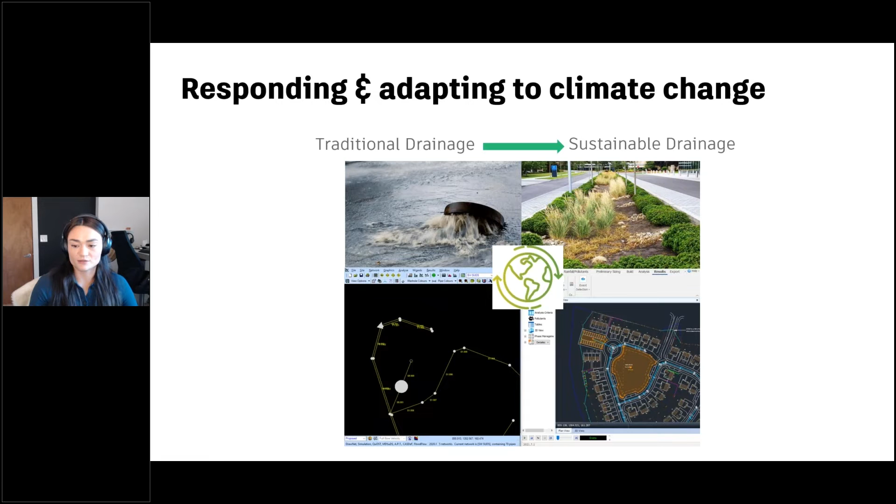They want to make the most of the wider benefits of a sustainable drainage system. So with these moving demands and these drainage design challenges, we needed to create a better solution to provide the drainage design tools for now and for the future. And so that is InfoDrainage.

InfoDrainage is our next generation drainage design platform. It has a graphical interface, highly detailed green infrastructure analysis, and streamlined workflows. We've built it so you can design creative, sustainable drainage structures as true to life as possible, as well as improve your ability to model and communicate increasingly complex drainage schemes.

I'll pause here to mention that Innovyze has a long history with drainage design. Our Micro Drainage product dates back to the 1980s. Since then, we've been able to harness that 40 years of industry research, development, and knowledge into InfoDrainage.

So how does InfoDrainage solve those drainage design challenges? For the remainder of this presentation, I'll go through these four main mechanisms by which InfoDrainage allows you to address those drainage design challenges that we mentioned earlier. And we'll start with project efficiency.

Really, this aspect is kind of the most important, if not the most prevalent, that underlies all aspects of InfoDrainage. I can evangelize green infrastructure as much as I want, but if it's not an efficient tool, if it's not helping you be more efficient with your workflows, then there's not really a point.

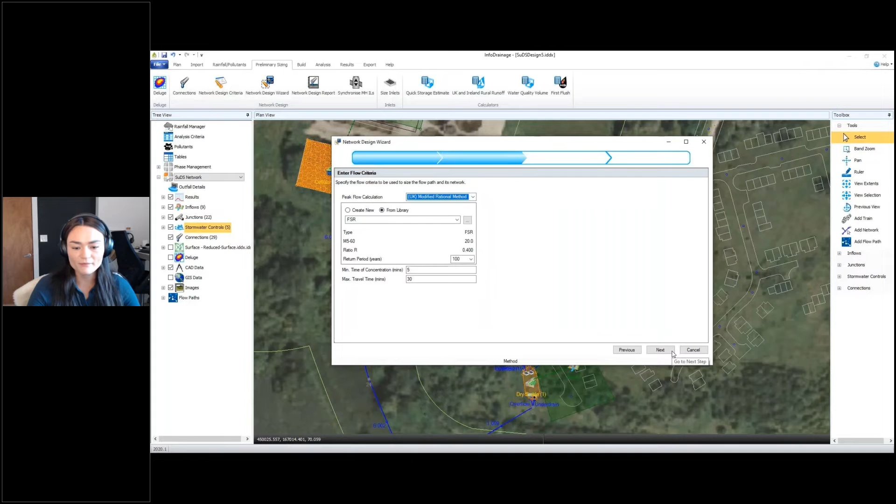Here you can see an example of our network design wizard, which guides the user through the right-sizing and network optimization workflow. All recommendations to the user are clearly highlighted and easy to review, with no changes being made without user confirmation. So you have control over what's being updated and what's not.

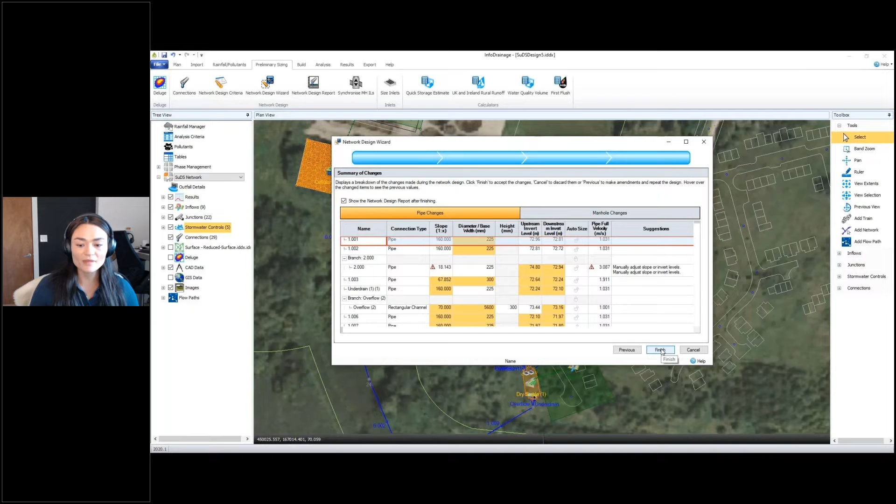These full network details can also be reviewed in tabular format, just to keep everything organized. And we also have storage requirement calculators built in, and results can be used quickly to create or modify structures. In this example, we're using that calculator to resize a cellular storage structure.

Once we accept those changes from the calculator, we can see the results applied automatically to both the detail of that storage structure and on the plan layout.

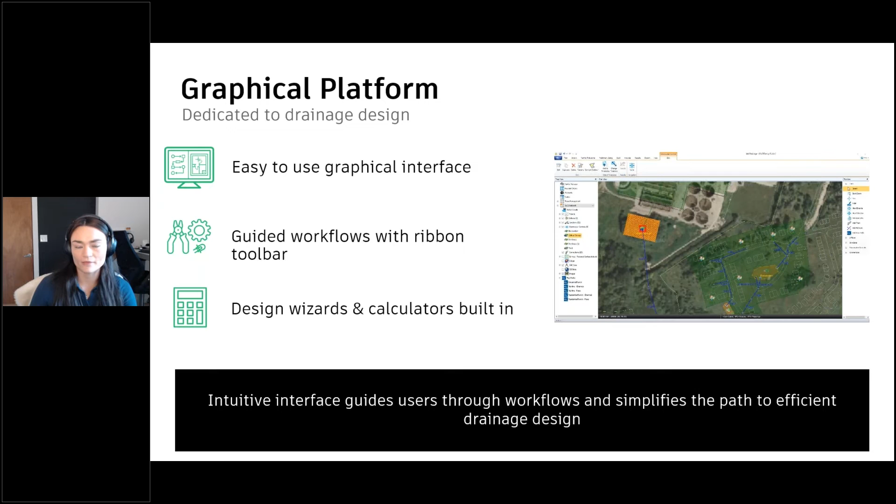Moving on to simple data import. Data is obviously generated in many formats, and InfoDrainage essentially helps you make use of what's already available, so you're not having to manually retype any information, enabling you to really utilize anything and everything you already have available.

There's a wide range of different data formats that can be seamlessly imported to create and update those designs more quickly and efficiently. This allows the user to better utilize existing data for a site and remove some of that manual workload. Being able to make use of existing data supports a streamlined design process.

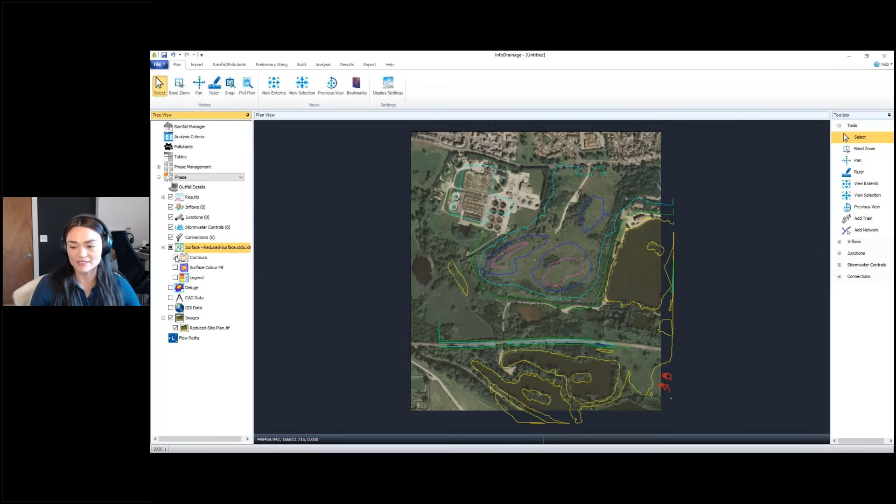With this data available and quickly imported, it'll enable tools like the deluge function to identify blue-green corridors on a site. We'll go into that deluge tool a little later, but you can see how easy it is to add imagery and surface data.

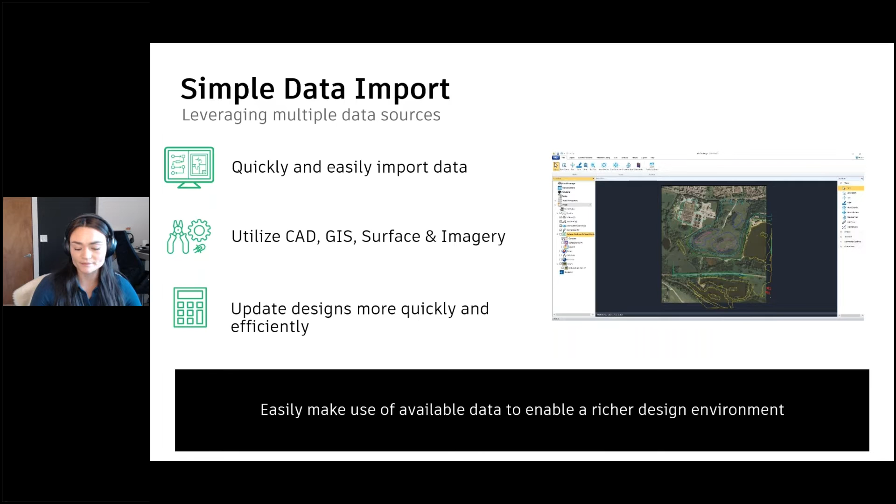Along those lines, there's also this streamlined design process within InfoDrainage, again being able to more quickly set up a model by intelligently importing that design data, leveraging CAD and GIS, and not only having those things loaded as background imagery, but actually applying and importing them intelligently so you can apply them as aspects of your drainage design model.

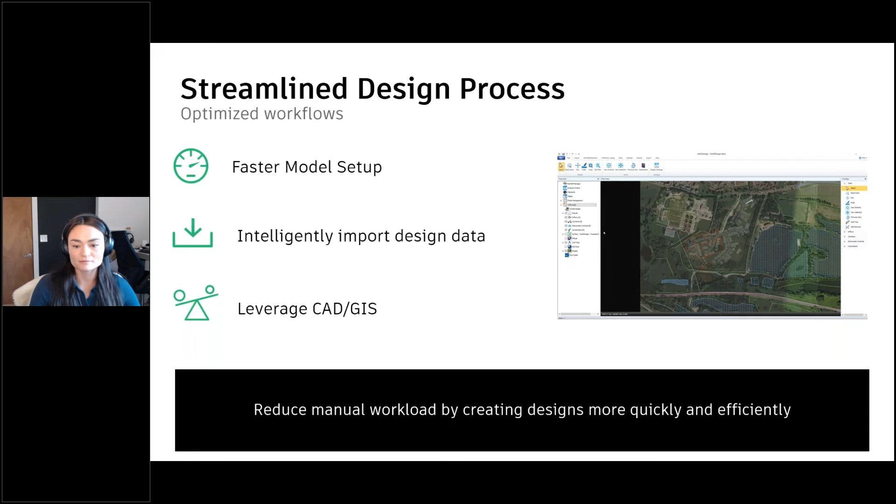So again, there's a wide range of different data formats that can come in. One key task is the definition of catchment areas or inflow areas, and then the assignment of these areas to the structures that are going to drain that water.

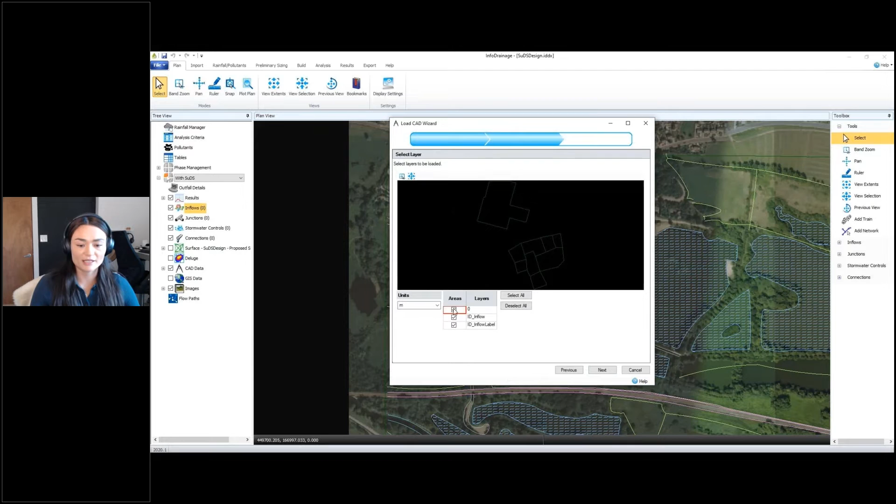Here you can see we're importing a CAD file which contains those catchment areas, and we've made this process faster so these can be imported directly. You can select which layer those are on via the import wizard. These catchment areas are now loaded and ready for assignment, which can be done directly on the plan, and you can start to update the characteristics of those drainage areas as well.

This is the concept-to-construction idea I was talking about earlier. Because of the tools within InfoDrainage, we're given the flexibility to continually modify designs on plan as we move through different iterations, different phases, and different levels of detail. It gives us a fast and iterative drainage design workflow.

From the outset of your design process, it's easy to lay out items graphically on plan. In this example, having already created an outline pipe network, you can see how easy it is to create green infrastructure elements such as a bioretention area or swales, and then connect these design elements to rapidly create those initial drainage design plans.

Here you can see we're using the Add Train tool to lay out some swales graphically on plan, and being able to make use of that supporting site data is crucial, but it's also rarely static.

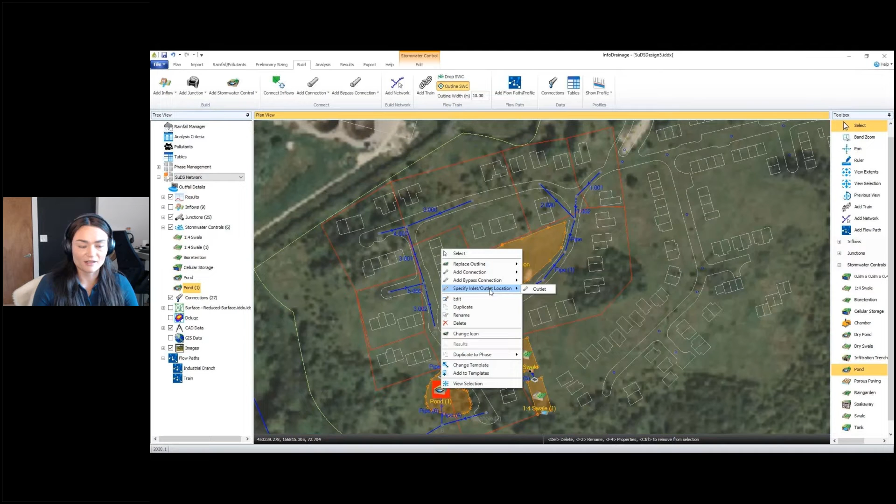The flexibility to continually modify things on plan, where you can see how big they are and where they're going to fit into your site, helps to support that fast iterative drainage design workflow.

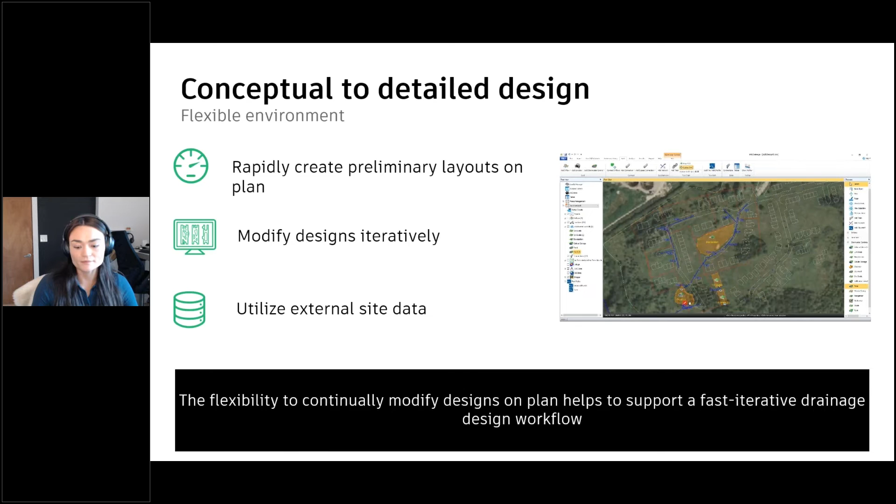Okay, so we'll move from project efficiency into optimized sustainable drainage design.

We mentioned earlier that designing for water quantity isn't really enough in the drainage design space anymore. For the sake of our planet and for the entities we design for, we also need to take into consideration all four pillars of sustainable urban drainage design: water quantity, water quality, amenity, and biodiversity.

This is something I personally get really excited about. When I first started my engineering career doing some green infrastructure design calculations, I had starry-eyed hopes of developing beautiful green infrastructure elements that would add to the overall placemaking of a site. But it turned out we didn't really have an efficient and accurate way to design those things that I wanted to.

with traditional spreadsheet methods. But InfoDrainage and the tools therein allow you to visually represent these green infrastructure elements, model them accurately, and optimize them without being over conservative, and actually allow you to get those drainage designs approved and built.

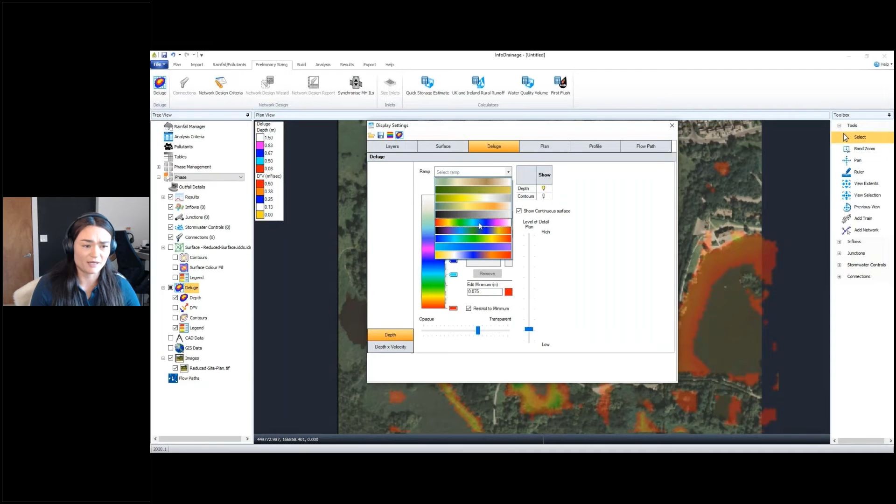And having that surface data and having that background imagery is really all we need to give us a compelling analysis. And then you can update the thematic elements of that analysis so that you can easily change them, so that these results can be quickly shared with stakeholders via a simple export, whether that's to an image or to a CAD file, for example.

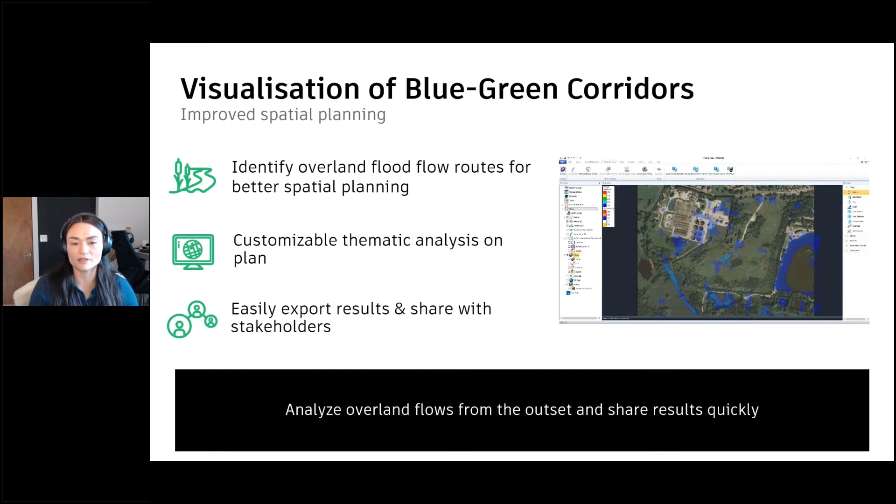And this deluge tool, I also like to mention, can be a great QC tool on a finished grade, just to take a second look at where water will go if for some reason a drainage feature were to fail or get clogged. So you can bring in your finished grade surface, run that tool on it, either send it back if you're seeing ponding areas in your buildings, or just give you that visual element that you can include in your drainage reports and share with different stakeholders.

And so efficient system layout, we obviously had that whole section about project efficiency earlier, but again, it really underlies everything, including the optimized sustainable design features within InfoDrainage. And so one thing that's really nice about having these green infrastructure templates on plan and doing those calculations in one place is that I know when I was first starting out as a drainage design engineer, it was really difficult for me to use a calculator, use a spreadsheet, learn that I needed to have a bioretention facility that was 10,000 cubic feet or whatever, and then just simply by looking at the plan in my CAD drawing, understand how this is going to fit and how this is going to work.

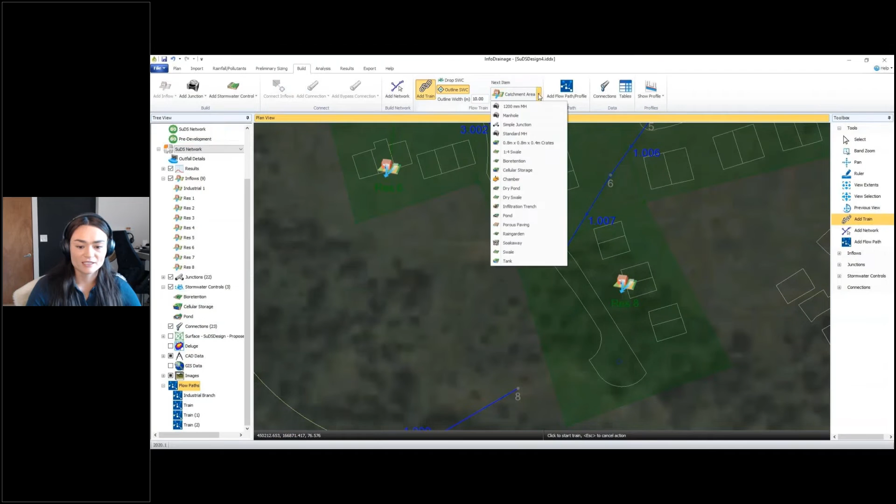And so with InfoDrainage, it's really easy to drag and drop different features, different templates onto your plan, tweak the footprint with that background information, and check that those volume and discharge requirements are being met all within the software. So in addition to our pipe and manhole design that we saw previously, we can use the Add Train tool to quickly lay out multiple LID structures.

So these templates can be made to make this process quicker and more accurate, incorporating pre-configured details of the chosen structure, including things like underdrain and overflow templates within the detail, for example. And so you can see here how easy it is to lay out those swales and connect them to your previously created pipes and manholes.

We can also create and modify the inlet and outlet conditions associated with the swale. So in this case, we're locating our underdrain and our overflow on plan, and connections between these structures can also be created and modified, as well as connecting those inflow areas to the draining structures within your design.

And so we're also able to visually modify the layout of the structure to better represent what those structures are going to look like on the site. So here we're adjusting those footprints of those swales, making them as true to life as possible, so that what you design is what gets constructed and what gets pushed to your CAD drawings, to your Civil 3D drawings when you actually print those and send them out. And so it really just gives you a better feel for the overall site layout as well.

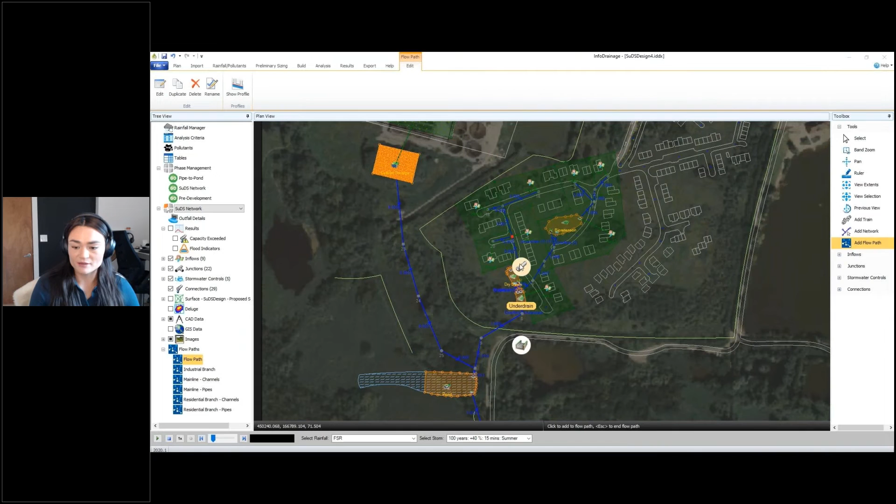And so this guesswork really leads to over conservative estimates, and you might end up taking up too much space on your site, or worse, if you're not being over conservative, you might end up with undersized elements that fail once actually constructed. And so InfoDrainage offers improved hydraulic representation and ensures a sound understanding of how the water passes through interconnected LID structures, and that's really central to the hydraulic engine. So the engine also gives consideration for the different levels of filter media and the effects of those structures slowing down flows. So we can see that in detail in this visual long section view.

And really what this animated profile helps demonstrate are the benefits and the performance of all the structures being used within a design across a site. And so in this example, having already run an analysis on our design, the results can be visually replayed in this animated profile view, which helps to provide a better understanding of how the design is performing and how these different elements affect one another as they start to fill up, as the upstream pipes start to fill up, and that sort of thing.

And so this graphical feedback from the results, such as pipe capacity being exceeded or flood risk level warnings, can be shown both on the long section as well as on the plan view directly, which helps to inform the user that a specific area of a design might need further optimization during certain storm durations.

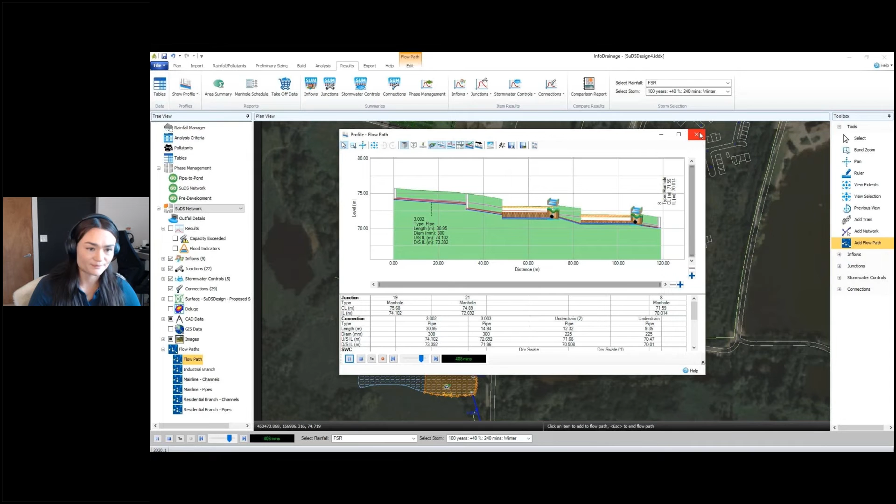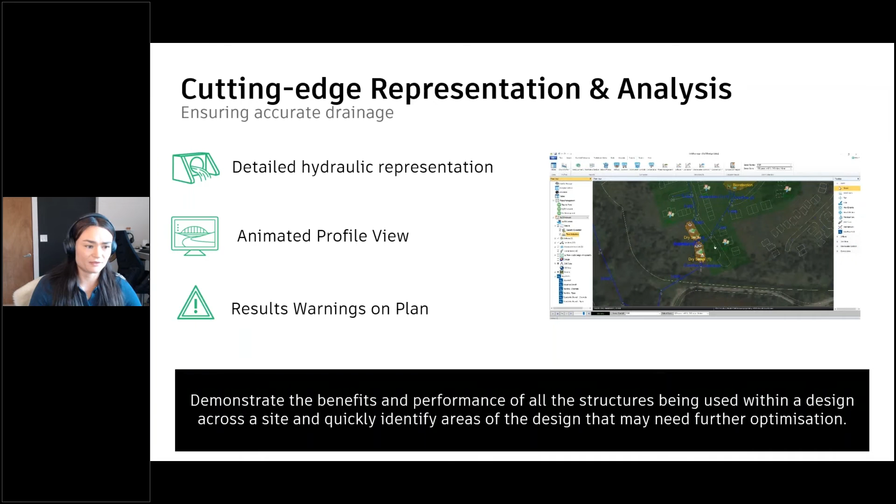So now we'll take a look at what those look like on plan. I mentioned that you can see those in the profile view, but you can also turn them on and just view the entire site as a whole, giving you quick access to the areas of your drainage design that might need more optimization.

So now we will move from talking about green infrastructure and sustainable drainage design to enabling BIM workflows. So since Innovyze's acquisition by Autodesk, naturally the most common question that we started to get was, are your products interoperable with Civil 3D? And in the case of InfoDrainage, that answer was yes, even before the acquisition.

So we all know that drainage design will often involve iterative changes throughout the project, and that these iterative changes, these updates, can be really painful and really time-consuming to address. And we know that these designs need to be taken from concept to construction, and we need to make sure that our drainage design fits into all other elements of the site.

And so what I mean by that is that we need to do some sort of clash detection analysis to make sure that you're not running into electrical, potable water, everything else that's going on in your site. And so we need the drainage design and all other elements in one place at the end of the day, which for most engineers ends up being a Civil 3D drawing. And from there, plotting all those things and submitting them as construction documents.

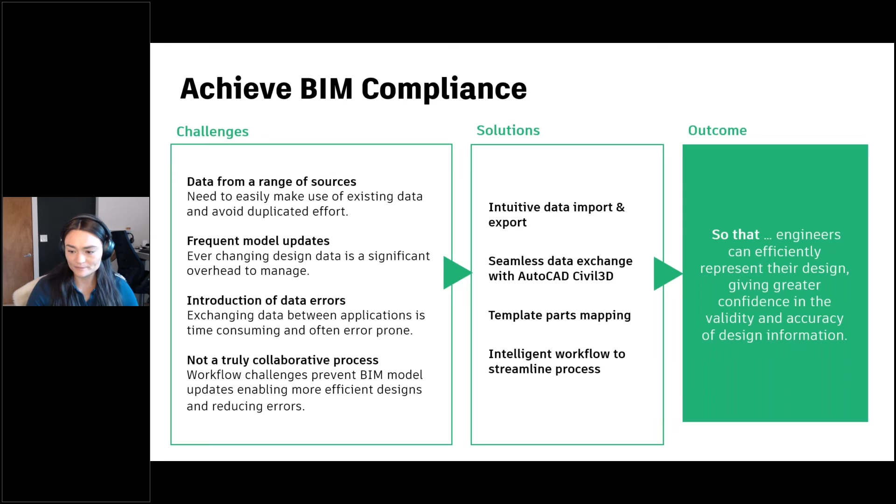And so one of the most common questions I get about InfoDrainage is the interoperability aspect of InfoDrainage and Civil 3D. I won't talk too much about why it's important. I think that's pretty widely understood, but we'll just kind of dive in and show you how that's done. So there is a seamless data exchange with Civil 3D.

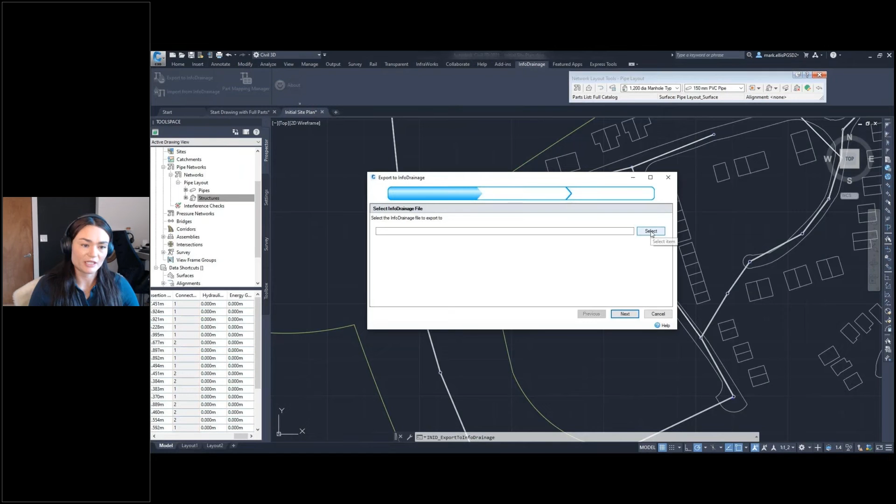So you can start within Civil 3D and benefit from all the design tools that are already offered within that software, and create your design layout there if you wish. So in this example, the design is just at the early stages of an initial pipe layout. And so utilizing that dedicated InfoDrainage Civil 3D ribbon, you can initiate an export of your CAD data to InfoDrainage. And this export wizard guides you through that process in a streamlined fashion.

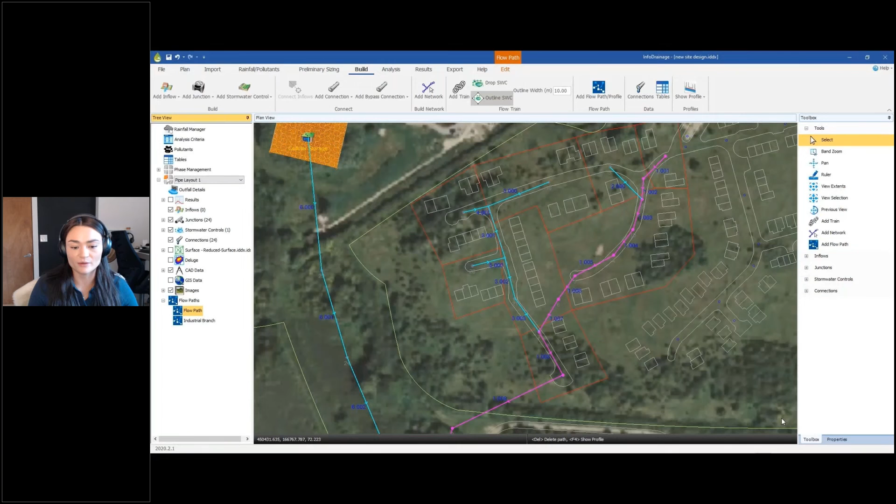And so from here, that design can be opened directly within InfoDrainage. That data can be reviewed in detail and further enriched with supporting background site data as desired. And the tools to review that data within InfoDrainage graphically on plan, via long section view, or in detail in tabular view, provide you what you need to begin optimizing and designing and creating your drainage solutions.

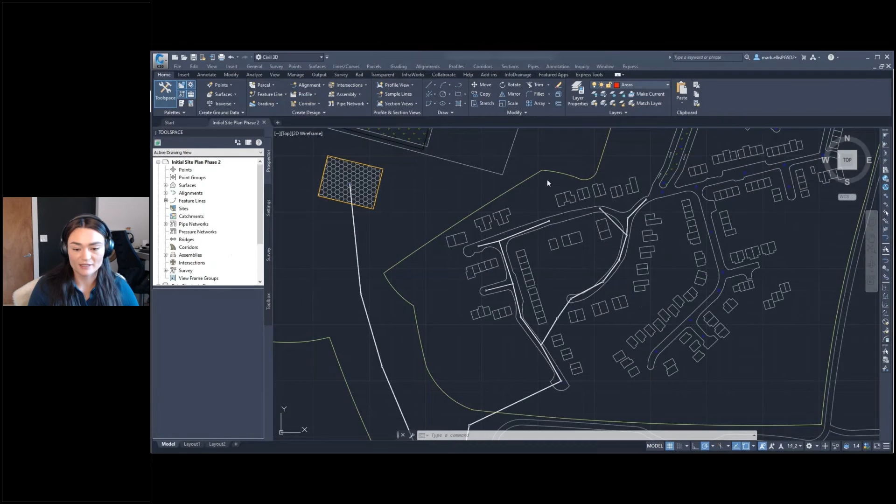And so this slide highlights some other things, but essentially, having completed some initial work in Civil 3D, exported that to InfoDrainage, and completed your drainage design there, you can bring that back into Civil 3D via a similar guided import process. So this round tripping of data gives the engineer greater flexibility in terms of their workflow, and using this parts mapping enables faster 3D object representation.

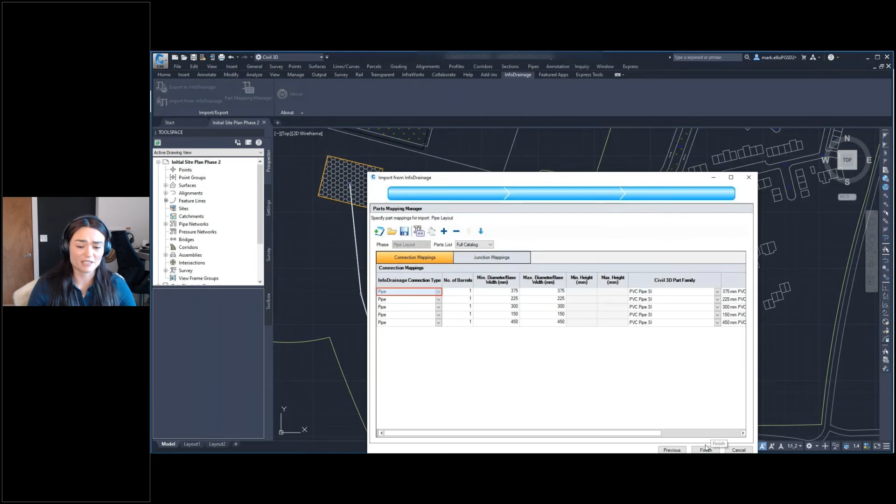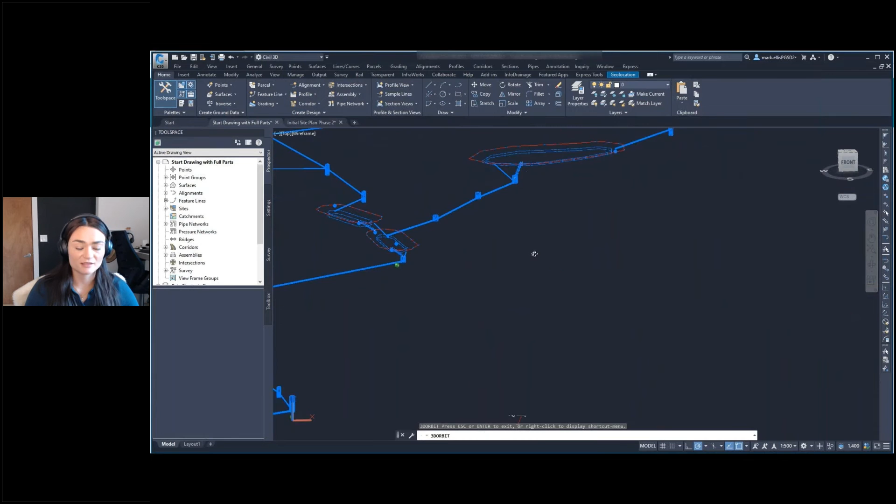And so in this example, you can see the visual representation of the design in a couple of the native Civil 3D views. You can see that the pipe network was brought in, but so were the stormwater control structures. And those are accurately represented in the surface as laid out on plan in InfoDrainage. So further design iterations within Civil 3D are minimized by maintaining those correct connections, by maintaining those inlet and outlet locations from the graphical plan that you already completed in InfoDrainage.

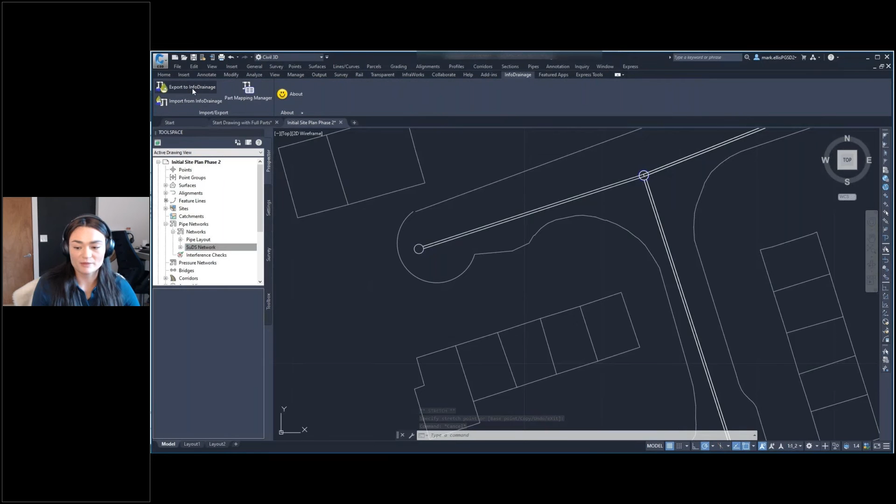And if we do want to make design changes in Civil 3D, we can then update the existing InfoDrainage files by following a similar export process. And so this can be repeated as many times as is required, round tripping the data easily between those applications.

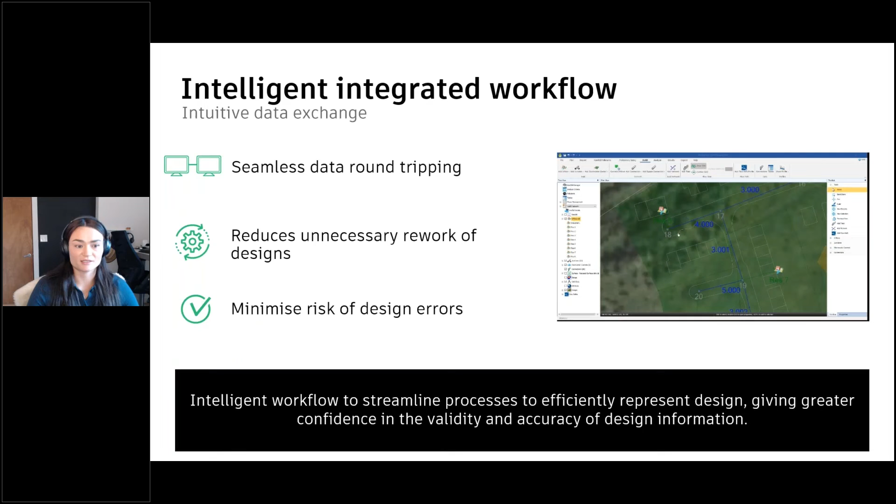And there's a couple things that I want to note about the InfoDrainage and Civil 3D integrations. So first thing is when you update the Civil 3D pipe network with your InfoDrainage drawing, the Civil 3D pipe network is updated and your references are maintained. So what that means is if you start within Civil 3D, you have a Civil 3D pipe network, bring it to InfoDrainage, make some changes, then you want to bring it back into Civil 3D.

The elements are not replaced, they're not duplicated, they're actually updated, and your references, including alignments, surfaces, labels, are maintained. So you really start to minimize a lot of rework there. So if you have profiles already set up, you don't have to go through and delete duplicate pipe elements. You already have those references so that you don't have to go back and recreate them. And really, you don't have to risk any drawing integrity there because of that network being updated.

And the second thing I want to note is that Innovyze is now Autodesk. That's why I'm giving this presentation on Autodesk letterhead. But really what I mean by that is our development teams are now officially collaborating and working together. We're under the same umbrella. And so we can really expect very powerful improvements to these workflows on top of what we've already accomplished before the acquisition.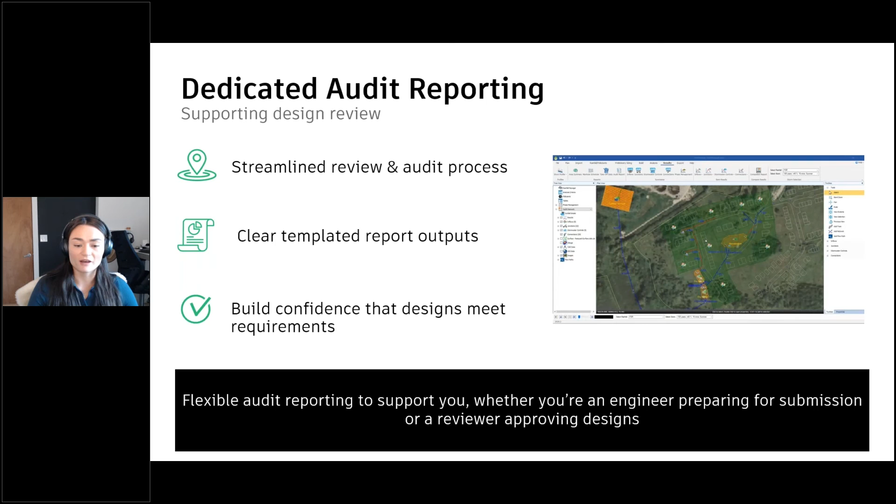InfoDrainage's streamlined review and audit processes are easy and repeatable enough that you can use and edit them throughout the design process. So you're staying on track, you're constantly checking to make sure that things are going to be approved that first time around. So whether you're an engineer preparing for submission, or if you're a reviewer who is approving those drainage designs, you can be confident that the design is meeting those requirements every time. So let's take a look at that reporting.

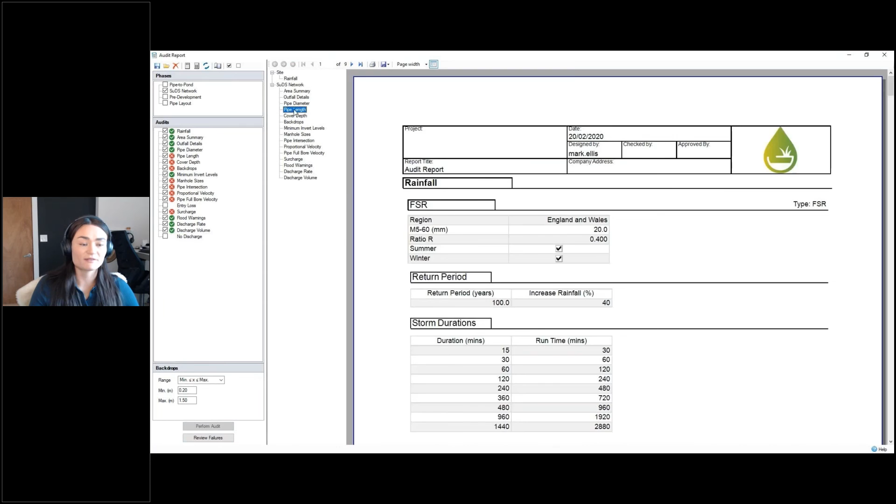So the audit report capabilities within InfoDrainage help to demonstrate compliance with local requirements, whatever those might be. So you can create these audit reports to check the properties of a design against a range of criteria that is user defined. So you can make it as specific as you need to your local jurisdiction. And here you can see how you can customize that report manually in the first instance, but of course you also have the ability to save these audit reports as a template, reducing the need to re-enter data and allowing quicker submission to multiple authorities with differing requirements.

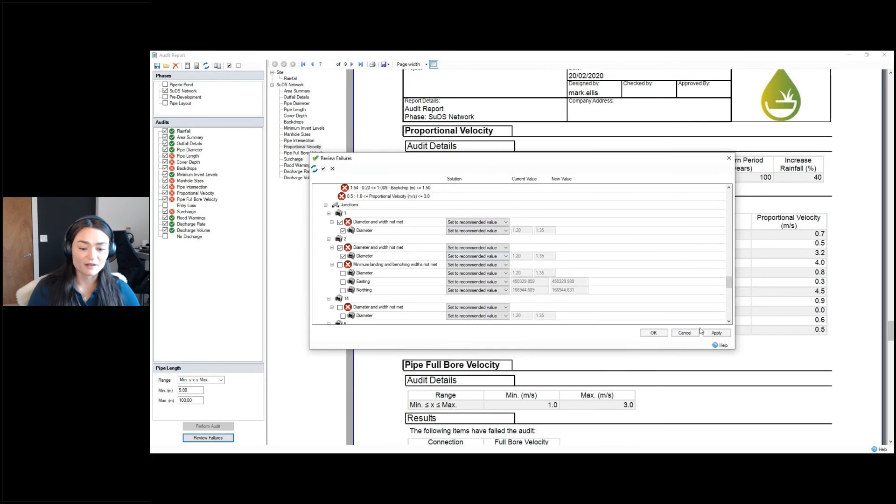And so if all that data and results already exist, there's no need for additional analysis to be run again, which saves the engineer time. And so here we can see the audit report outputs, which allow you to get into the detail of that audit's findings. And we can also validate and review those failures directly, and you can just check that box, press OK, and they'll be accepted, which just having those suggestions allows you to quickly revalidate and then rerun and perform the audit again.

So next, we will talk about customizable reporting outputs. So theoretically, the difficult part of drainage design is the drainage design itself. You know, that's what we went to engineering school for, is to do the engineering work. But oftentimes we're stuck wasting our very valuable brains, and I mean literally valuable if you're talking in terms of billable hours, of course, wasting our time copying and pasting results into the necessary formats.

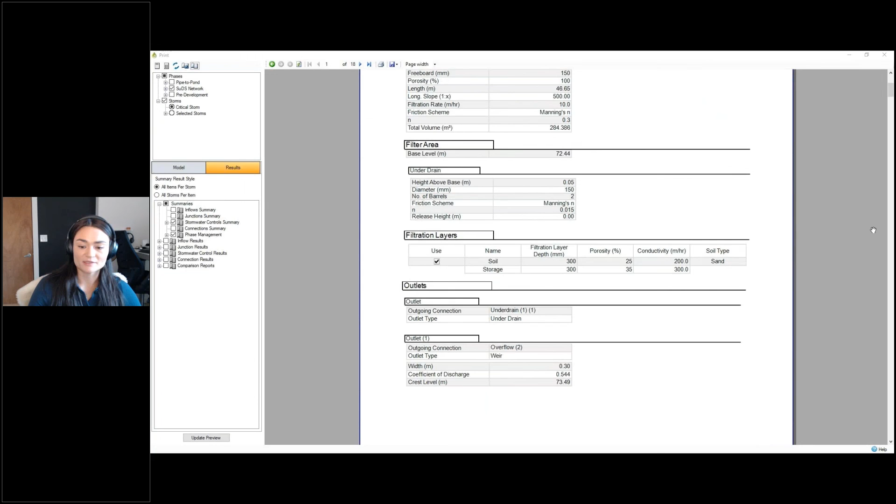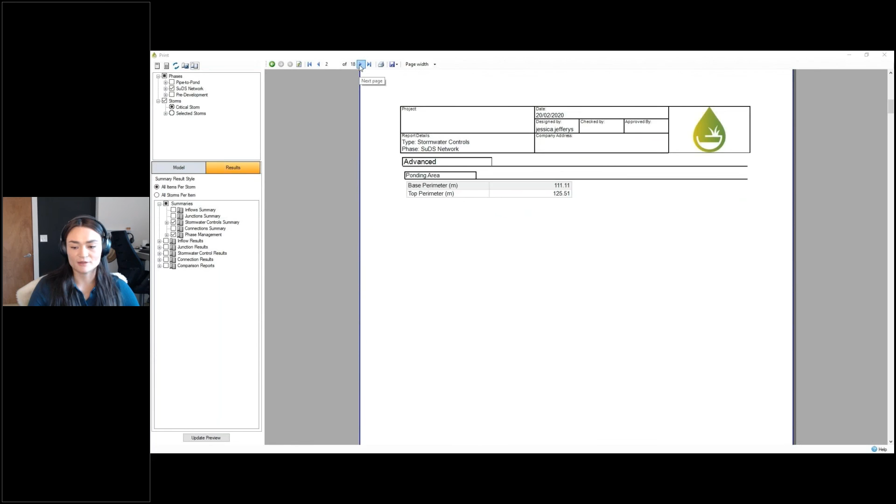And so InfoDrainage's customizable reporting outputs give engineers tabular and/or graphical reports that can assist in driving faster design sign-off. So you can, again, spend more time designing and less time copying and pasting. So this is the customizable report builder, which allows you to create templates similar to the audit reporting tools. So you can have these reports for easy reuse. And it allows the user to define the report specifics and layout. And so this also provides flexibility to cater for meeting regional review specifications.

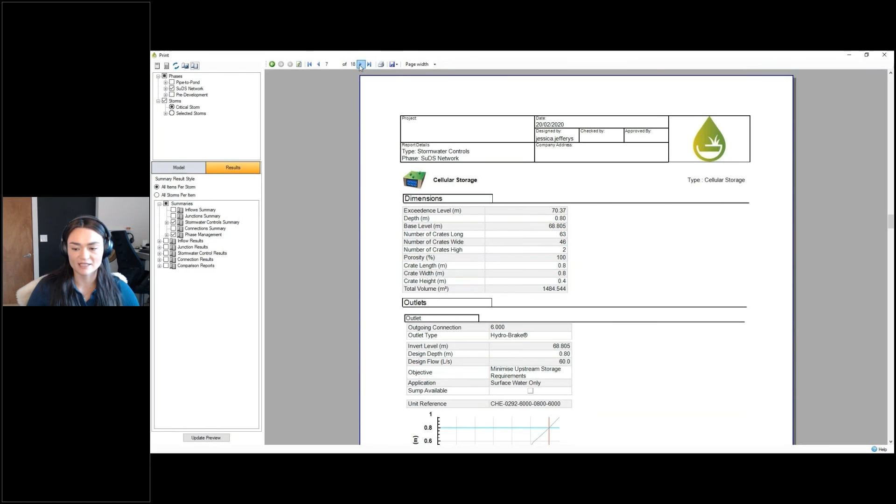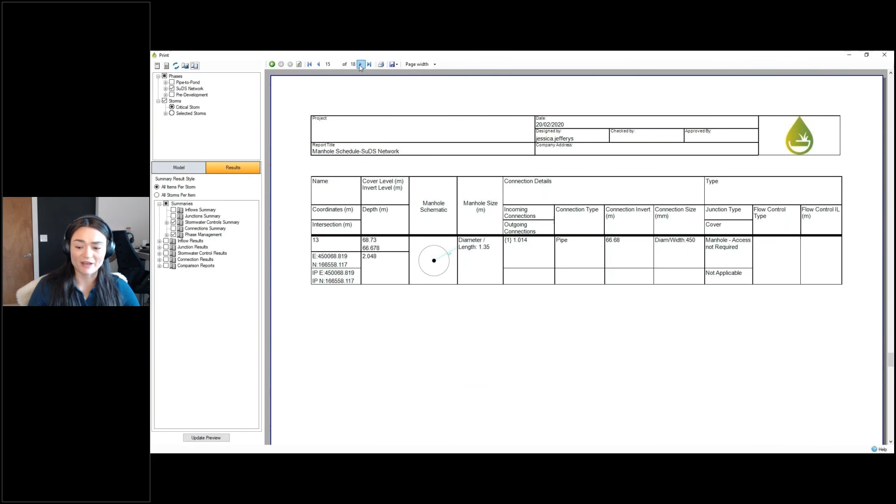InfoDrainage also helps to add clarity around communicating all the details of that design and showcasing how that design works. So we understand that drainage design can be complicated, but if you're able to clearly communicate that design, for example, here we're showing where water enters a structure and what type of outlet structures are being used, as well as the detailed dimensions, which really enables people to get a view quickly of what you're trying to communicate and what you're trying to accomplish with your drainage design.

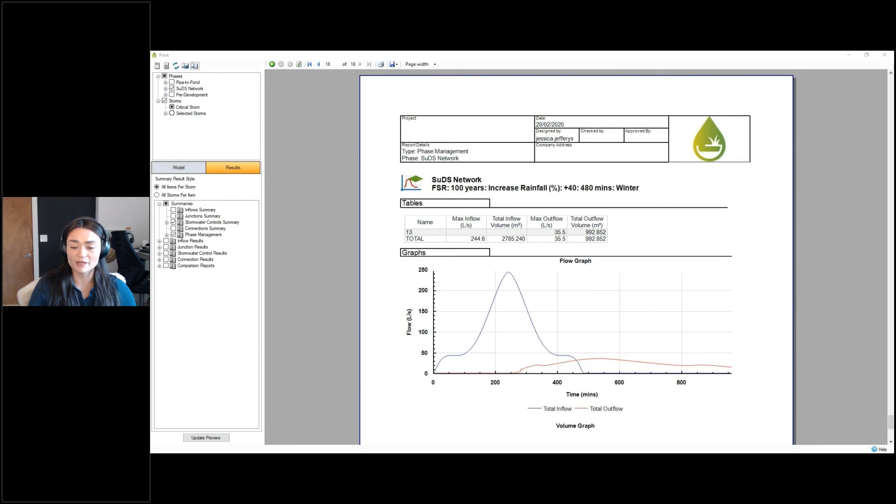We also wanted the pipe and manhole network to be more easily communicated with easy to interpret manhole and pipe schedules, as well as graphs of those different elements and the detailed results.

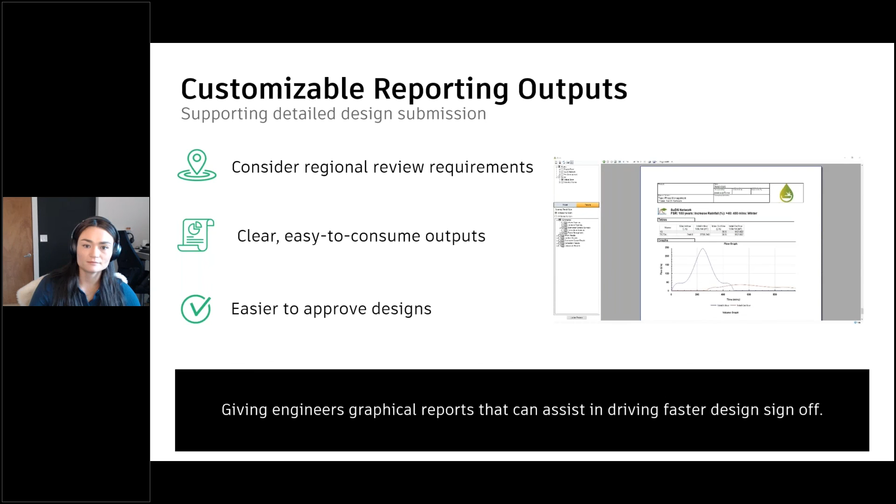So the last thing I'll talk about is demonstrating exceedance flows. And so I have this feature of InfoDrainage listed under gaining approval because some regulatory agencies are starting to ask for overland flow mapping in the event that a drainage structure does overflow. But really, this feature is something that can take your drainage design to the next level, both in terms of accuracy and in terms of instilling confidence in your clients that your design is going to function as intended, even during more intense rainfall events that we're starting to see as a result of things like climate change.

So InfoDrainage contains a coupled 1D and 2D simulation engine that can show where these overflows will go should they exit the 1D pipe network system. And so this enables compliance with various regulatory standards. And InfoDrainage really is one of the unique aspects in how it demonstrates and shows the interaction between green infrastructure elements and these overland flows.

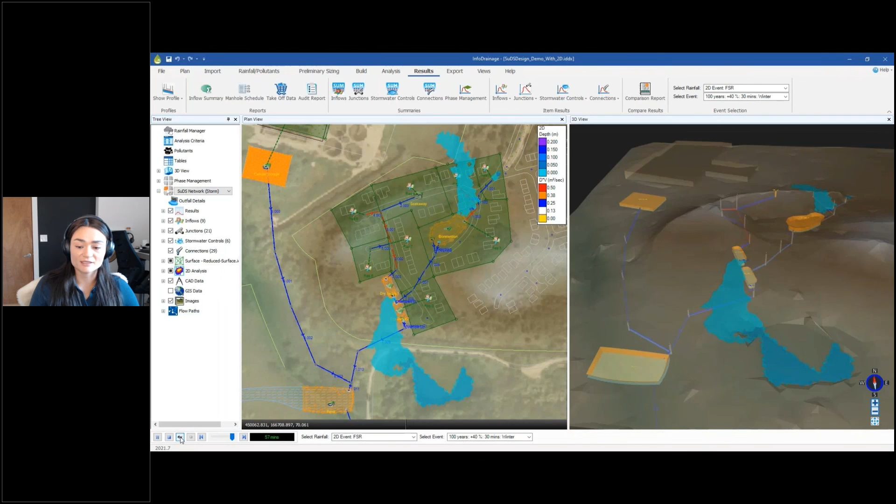So here we have an example of that 1D, 2D analysis. And so as I run the simulation, as that rainfall event progresses, and here we are showing a pretty extreme rainfall event, again, we're kind of talking about climate change type of scenarios here, but you can see where it floods out of your structure. So as those stormwater controls are overflowing, you can see where that flow, based on the surface data that you import, is going to go. So we get that accurate representation continuing all the way to these exceedance flows, which again gives you that confidence in how your drainage design system is going to behave, and that any regulatory requirements surrounding overland flow will be met.

And so that is InfoDrainage. We talked about how you can define those true to site structures quickly, dragging and dropping different green infrastructure templates onto your site, resizing them, and calculating how big they need to be to help you effectively make the best use of space. We talked about being able to analyze and optimize the system as one. So being able to connect those things, run the model, see how they interact with each other as they're in series, rather than analyzing each individual structure one at a time.

And we also talked about the different visualization options. So that's the deluge tool again, that's the 1D, 2D analysis. We talked about how we can export that design data back into things like Civil 3D, and how you can also export the details of your design data using things like the audit reporting tool and the customizable reporting options. So those can be sent to a variety of stakeholders for quick approval.